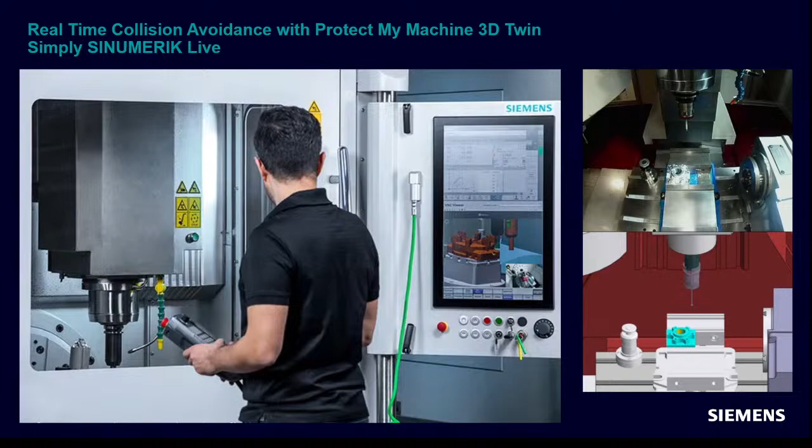I'm your host, Chris Pollock, and today we're going to take a look at a relatively new piece of software for Siemens called Protect My Machine 3D Twin. Now, Protect My Machine software is kind of the latest in a series of softwares in the collision protection environment, right? So Protect My Machine is kind of our newest and most advanced feature of collision avoidance.

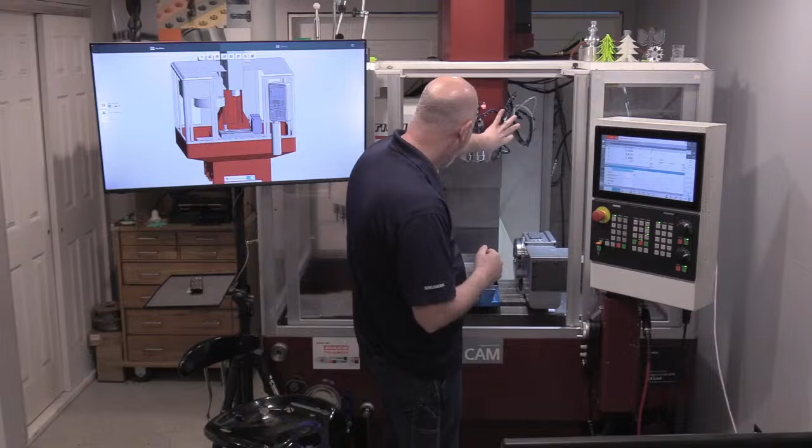Now, Siemens is no stranger to collision avoidance. We've had products in this space for a long time, and the traditional collision avoidance that we've offered had a very specific task in mind. It was designed to protect my base machine elements. So what do I mean by that? I mean, this spindle should never be able to drive into that table, right? This head should never be able to hit this fourth axis.

On a more complicated 5-axis machine, as your trunnion table, let's say, rotates around, my elements of the machine should never collide. Now, what it didn't know, and it was never designed to do, was protect your fixtures. It had no idea where this vise was in space. Your workpiece blank, it didn't know where that was. Your tool holder, it could protect your basic tool geometry, like your length or projection and your diameter, but it had no idea what the tool holder shape was, so there was no kind of holder protection.

And this is what led us to develop Protect My Machine 3D Twin. What 3D Twin allows me to do is I can create an entire digital environment of my machine space, including my work holding, my stock material, all my tool holders in their library. And once it's implemented, I'm now protecting that entire space.

So, you might see this piece of software over my shoulder here and take a look. And for those of you that are maybe familiar with our digital twin software, Run My Virtual Machine, you might say, boy, that looks very similar. That must be Run My Virtual Machine. And you'd be almost right. So the software is based on the 3D side of Run My Virtual Machine, but this is in fact Protect My Machine 3D Twin. Now there's a fundamental difference between the two products.

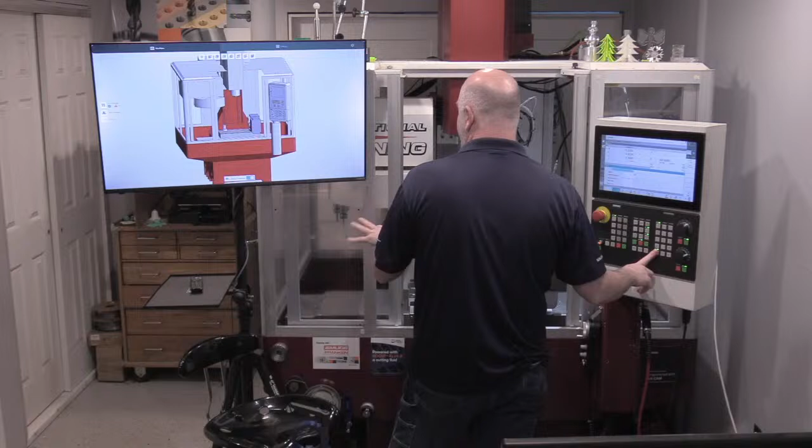Now when it comes to collision avoidance and protecting the machine with Protect My Machine 3D Twin, the difference here is now that model is connected to this machine. So if I come to the machine and I start jogging it, you're going to start to see the model is moving in connection or in time with the machine tool. They're handshaked. So anywhere I ask this machine to go, it's going to know in this 3D space.

Now this software, this is sitting on a PC. It could be implemented right in a PC at the machine tool control. That would be one option, quite commonly applied. Or you can actually have it running on an external PC. So in my case, I do happen to have a PC right here. This is where I kind of manage the videos, do my production, and I do a lot of my job preparation here as well. So I opted to install it on this PC.

On my machine, this is running our embedded system. So this is running a Linux environment. So in this case, I didn't have a Windows environment to install the software, so I'm using my external PC. Had I had a built-in IPC with Windows, I could apply it here at the control.

So what I wanted to do is I wanted to kind of show you the product and go through a little bit what the process would be in setting up a job, and maybe time allowing, we might even get a chance to cut some chips, certainly open up the Q&A to talk.

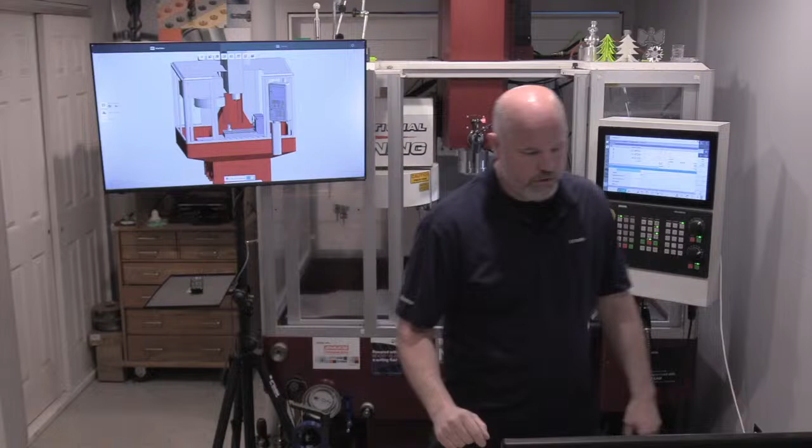But if I'm already using the digital twin, we've created some very simple ways to take all the work I've already done in setting the job up in my Run My Virtual Machine software and transition it directly into Protect My Machine 3D Twin. So that's the way I set this job up. So that's what we're going to look at today. We're going to jump into our software. We're going to take a look at Run My Virtual Machine, and we're going to now transition this job into Protect.

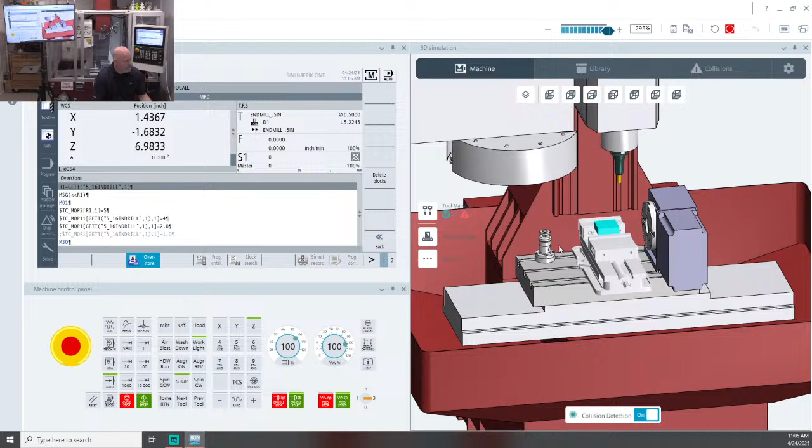Okay, so what you see on the display, this is my digital twin environment. This is Run My Virtual Machine. Normally you could see the name in the upper left-hand corner, but I do have my little camera view there so you can still see me. But this is where I would have set up the job. So this is a pretty straightforward setup. I have done quite a bit of content on this, so we're not going to get into all the nuances and detail here. I have previously set up the job in this software to save us some time. But let's look at what's unique to the job.

So first things first, I'm going to have some kind of a program. Now, in my case, I've established a shared folder, and that's where I see this Programs button. This folder is not only in Run My Virtual Machine, it's a folder on my PC, and that shared folder is also shared with the control. So I have a common working area. If I don't do that, I can absolutely transition the programs over to the control via USB stick or some other method. That's up to you.

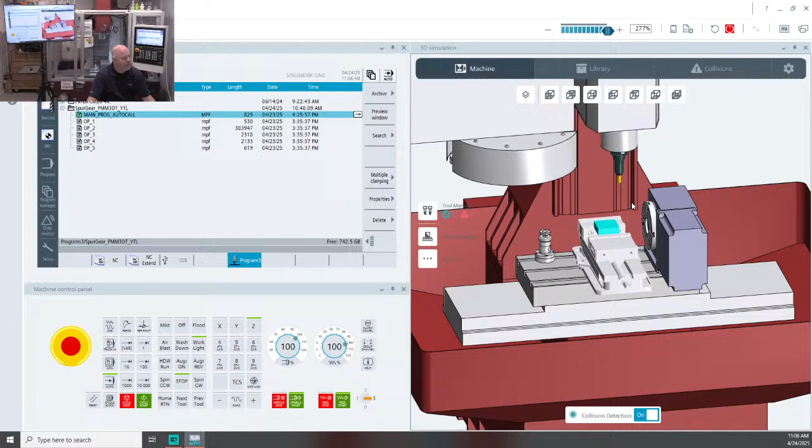I also went in and I started doing my setup, right? So I first came into my library, decided how I was going to hold my part. In this case, I'm using a standard 6-inch vise. Created some kind of blank for my stock. That was then installed on the machine, set up for my basic prove out.

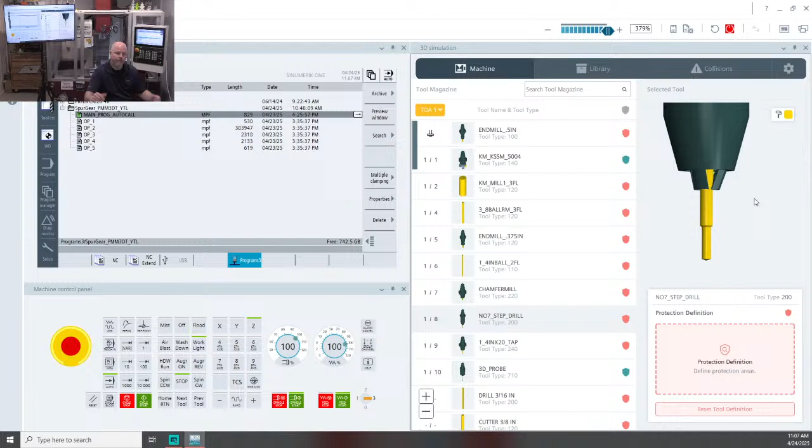On my tools, I decided to come in and bring in the models of my tools, drop them in, bring in some different custom tools. I was drilling and countersinking with two separate tools before, so I wanted to optimize that. So I brought in an STL of this Emuge step drill. This allows me to combine two operations in one, and I also wanted to show you how we would set that up. So here we have all of our tools set up in our library. We have our job set up, and now I would normally transition to our auto mode and run my job, right? So this would be my normal process.

Oh. Hold on 1 second. Overstore is active. What is going on here? Oh, I hit my overstore button. I was looking going, what is going on? Overstore is a little like MDI in auto mode.

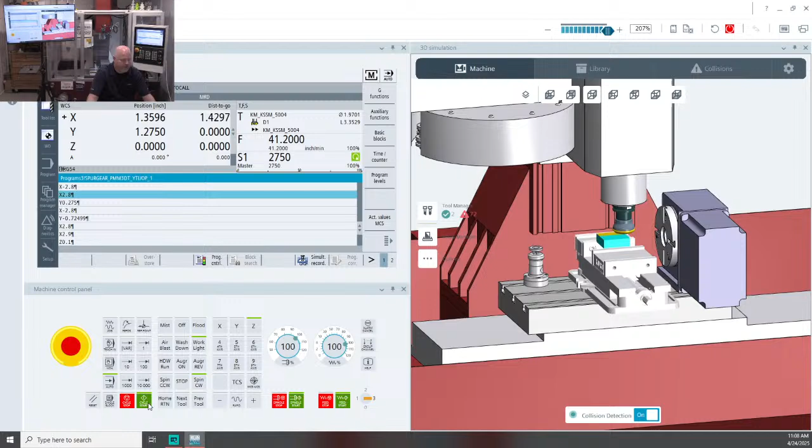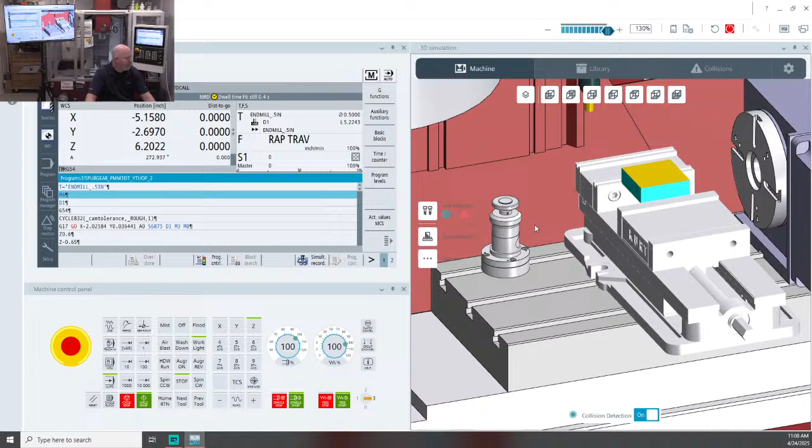All right, so I can check and do my normal proof of concept like I would do when I'm leveraging my digital twin. So this job was actually programmed out of a CAM system. I believe I used NX for this job, and then I spliced it all together. I did use a main program, sub-program strategy. So if you look back at this job, you see I got my main program here, and then each of my operations will be my individual operations for the toolpath. So I would normally come in, evaluate all this, system comes down, starts running my job, right? This would be a pretty standard process.

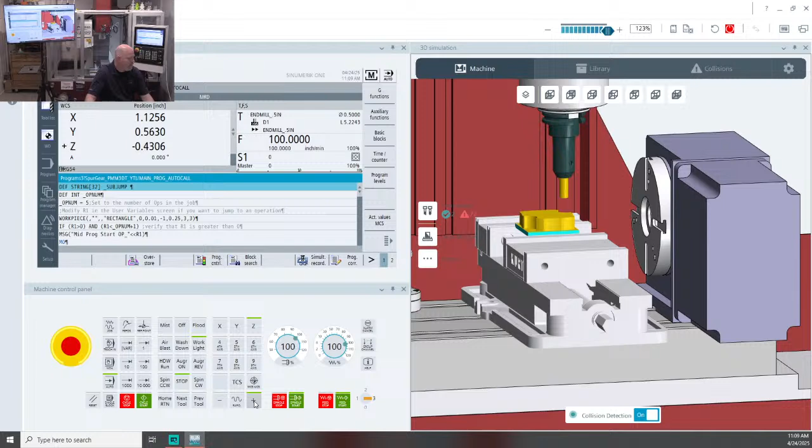And typically at this point, I would be at the end of my use case for my digital twin, because I did a proof of concept, validated that the tools look good, holders look good, I'm happy with my work holding and whatnot. So now I would just transfer the job over to the machine and start building it up. But in this case, now we have our 3D twin as part of this process. So I'm not going to bother simulating the whole thing. You guys, I'm sure, have seen this kind of stuff before. But once I have the setup proved out, now what I can do is I can start to transition data out of Run My Virtual Machine.

And it's quite simple. So what I'm going to do is I'm going to go to our little setup gear right here in the upper right-hand corner. Once I come to the gear, I want to decide what am I going to export. Now we give you a bunch of options.

I don't need the machine model because that's already there in the software, but I am going to want to grab my library of tools, work holding, all that kind of stuff, grab my settings. So just by coming in and selecting export, it's now going to give me the ability of exporting that data.

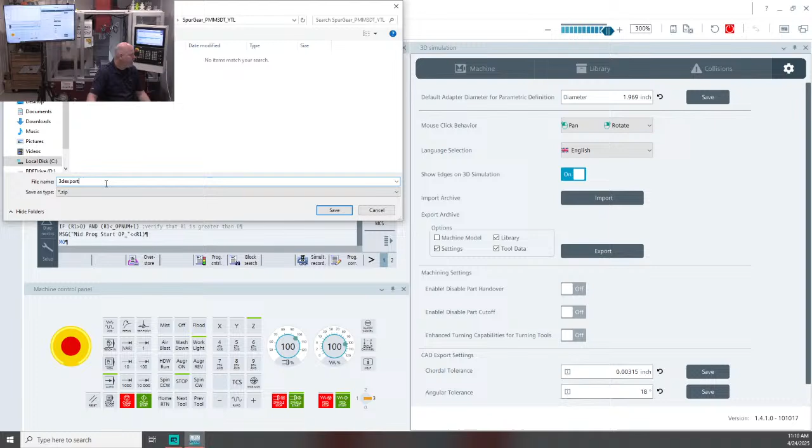So I'm going to come to maybe my shared folder and just create 3D export, a simple file, save it so I can access it from the digital twin side. Now when it comes to my program, since I'm already working on a shared folder, I don't actually have to transfer. If I wasn't sharing a folder, then I might copy that out to a USB stick or some other method to transition it.

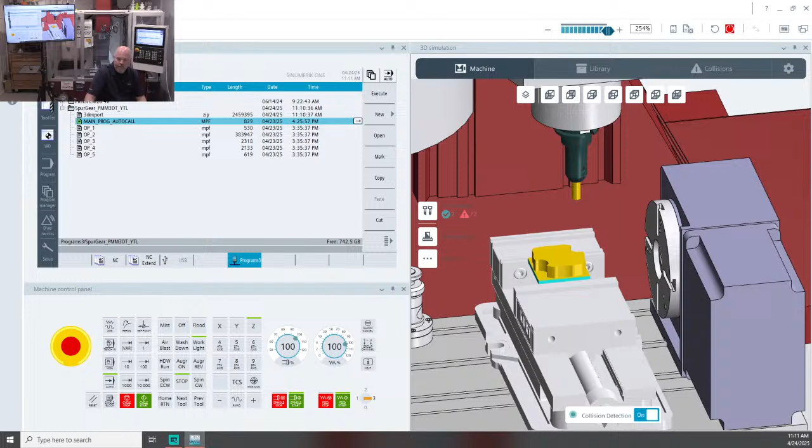You do see we got the 3D export zip file that was exported from the software. So now we can start to transition all of this into the 3D Twin software. Now, one of the things I have previously done, just for the sake of limiting the amount of time needed, I did pre-create the physical tools in the machine control, so you'll see that. But at this point, we can switch to our 3D Twin software.

And now I want to import my setup. So initially you look and the machine is kind of blank. It's in its natural state. If I look at my library, I don't have any setups currently in it, no tool adapters, no blanks. Everything is pretty much clear, right?

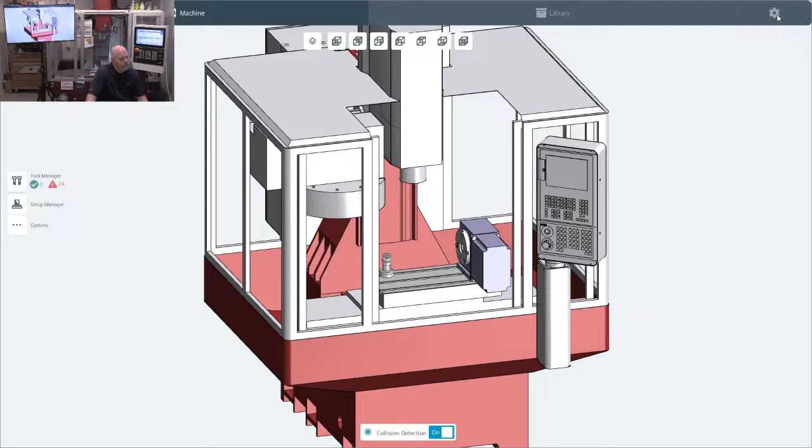So by going to the same spot, my little gear, and instead of exporting, I choose import archive, I can now bring in all that data that I previously set up. So we come up to our shared folder, find our new export, open it up, and now the system is going to bring that in.

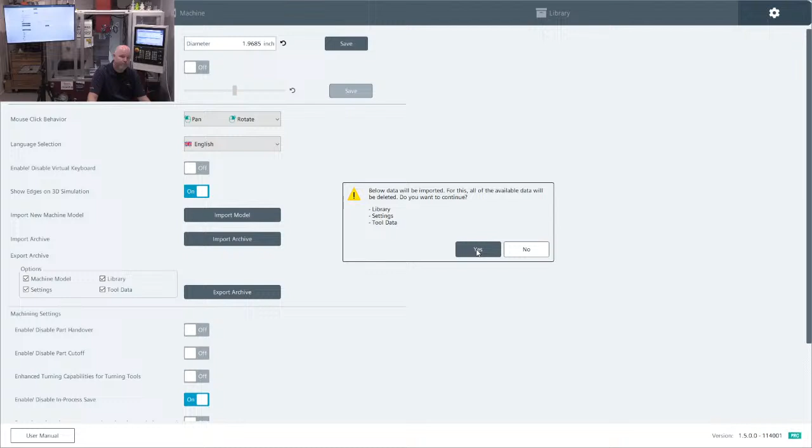Now, one of the things to be aware of when I use this method is it is going to wipe out anything that was previously in the library. So that's okay. If I didn't want to do that, let's say I already had some stuff previously set up in my environment, I don't want to lose it, I can also go into each of the library areas and discretely export specific components, right?

So I could have just grabbed the vise, sent that over, maybe a couple tool holders if I'm using a lot of common tools. So the process is really up to you how you're going to work it. But in the end, you want to bring that data in from that outside source, hence importing. Once the import is complete, we're going to get a little pop-up telling us that it's done importing that data that was exported from the previous software, and then we can move on with the next step.

And the next step being setting it up in the now machine world. There will be a couple extra steps because there's a few things that I have to accommodate for. So initially, we come back and we see now I have some stuff in my library. So there's my vise, there's my stock. I chose to separate these two.

Sometimes you'll do your setup and you'll have the stock already mounted to the vise. In my case, I would make that choice based on what I know I'm going to be doing. So I may be moving around the stock if I don't have a positive stop. So maybe I want the ability of having them independent of each other.

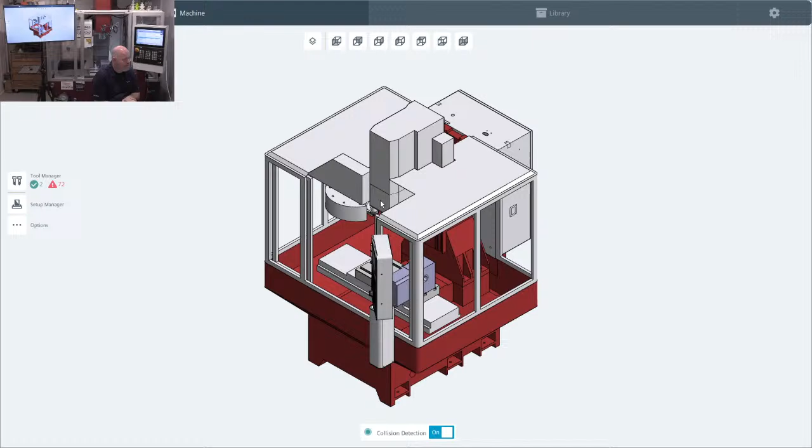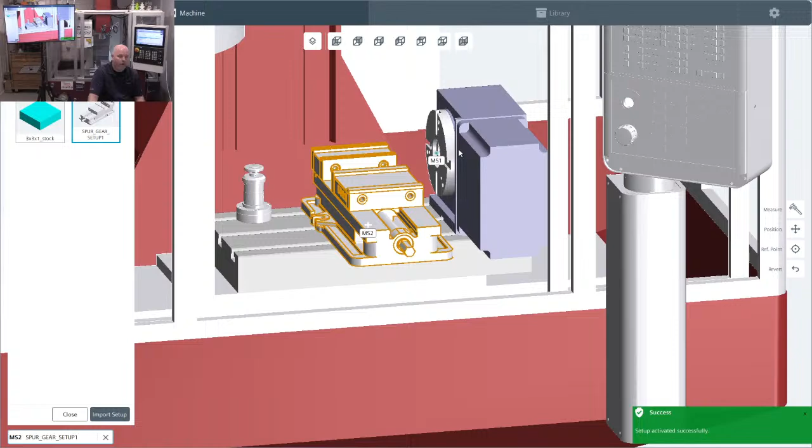Now you go into your 3D space, we can initially drop in the vise. So I'm going to go to import. I'm going to grab my vise, and this machine has two different mounting locations. Oops, and I grabbed the wrong one. We have my table mounting location or my fourth axis. So here we have a vise dropped in. Yep, so there's a rough position of the vise.

Now, one of the differences here that I have to accommodate for is, is this vise exactly in the middle of this table? You know, in 3D, I just dropped it on and it's good.

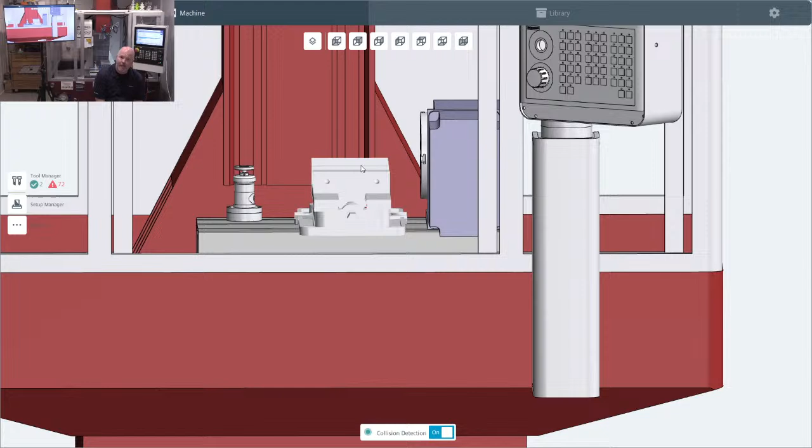But in the real world, when I bolt this on, it is probably not exact. So what I did was I actually established a zero on this vise to be the top center of the back fixed jaw. We're going to probe that vise to find its location, which will allow us to position the vise in the digital space, and then connect the models. But step one is I need to come down and probe it.

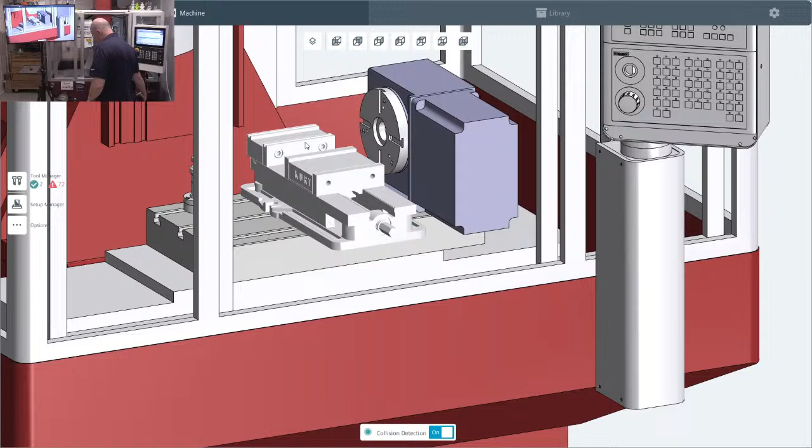So if I come to the machine, we'll just transition to our machine view, I can now start to move things around, give you a little bit more perspective of the view, and we can find the vise.

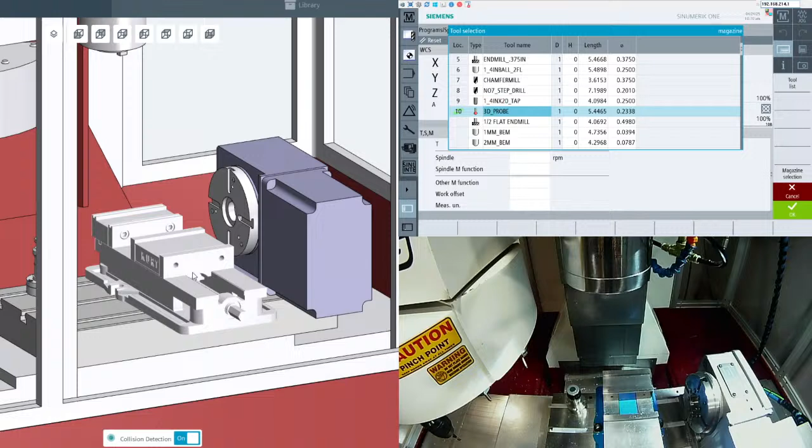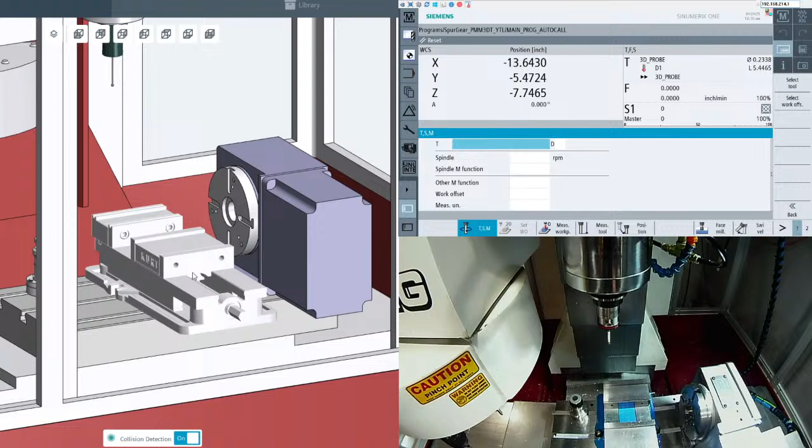Looks like I'm doing pretty good on time. It's always fun, you kind of manage these presentations, and I try to keep them less than a half hour long, and that's great, but how do you get all the content you're looking for in?

So in my case, I decided that I'm going to use G510, our 10th fixture offset, to set up my vise. I'm not going to go through the whole thing here, but I am going to show you some of it.

Now, if you look, I'm going to rotate around a little bit, take a look at our current position. If I was to bring my tool down, you see I'm nowhere near that vise. On the real machine, I'm right on top of it. But my vise itself has got to be an inch, inch and a half over. So this is why it's so important for me to have some mechanism to align the vise.

Now, I do currently have protection active, assuming my model is positioned in the right spot. Here you can see I brought my probe down where it would collide, but now it's just a matter of timing the two. I previously have set this up, but maybe I'm in a spot where I need to probe this edge but can't get down to it because it thinks it's hitting the vise. So if I need to suppress the protection, I can come over to this little toggle and turn my protection off.

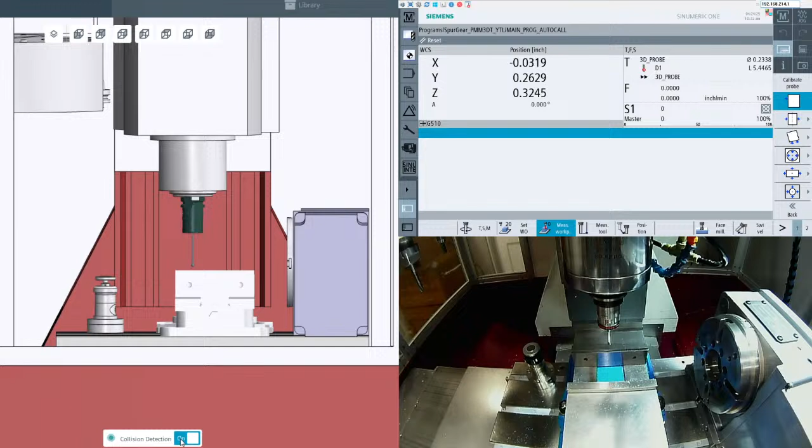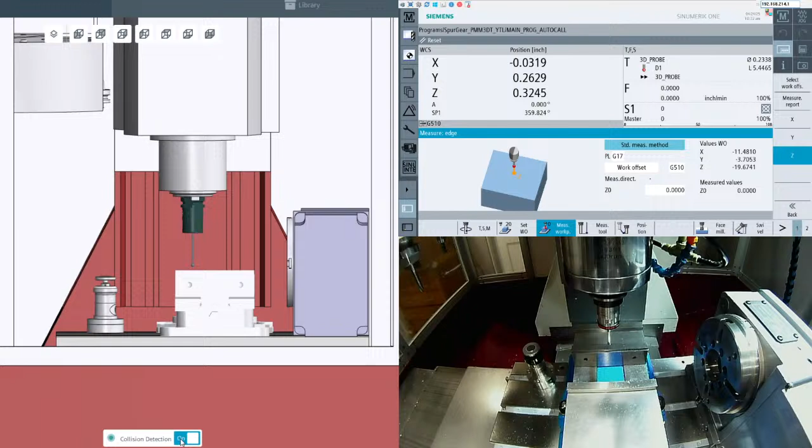But when we come into a measuring mode, the system's smart enough to understand that I'm being asked to probe a part of some type. Because of probing, I have to collide with some type of mechanism, so what we do is we suppress internally the collision model. We even give you a little message that it's being suppressed during the measurement, and away we go. So I previously found that top center point just like this before. We can get her out of the way.

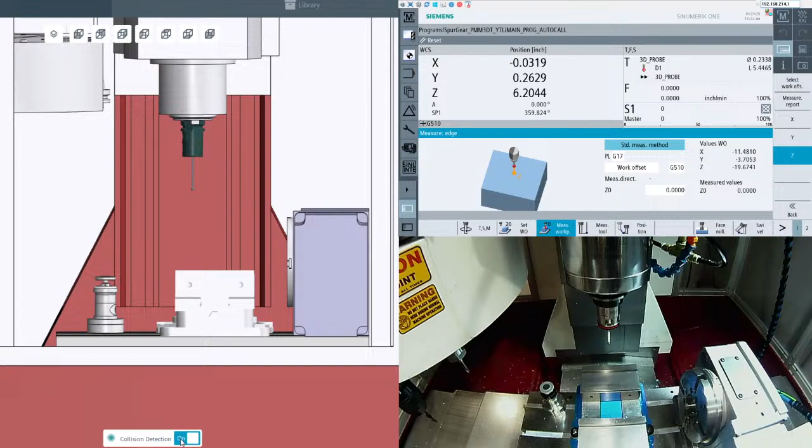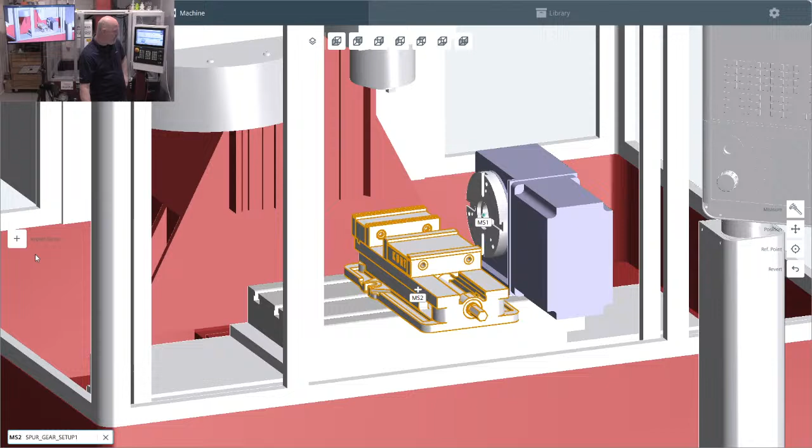So once I've established that zero, now it's time to connect the two. We come over, oops, not that view, this view. We come over to our 3D space, and first thing I have to do is tell it that I'm using a specific work offset for this vise. I can't do any modification of the model while it's mounted, so I'm just going to remove it initially. Then we're going to go over to our library, go to our setup, and open up the vise.

Once I've opened it up, here you can see I have my vises set up as my clamping, but what I want to do is go into this little offset, and we have a new feature you don't see in my virtual machine, which is this reference point option. This allows me to establish a reference point. I give it a unique name, and I can move that position around if it's something other than the zero of the model. In this case, I pre-established my model to where I wanted to set it, and now all I have to do is hit save.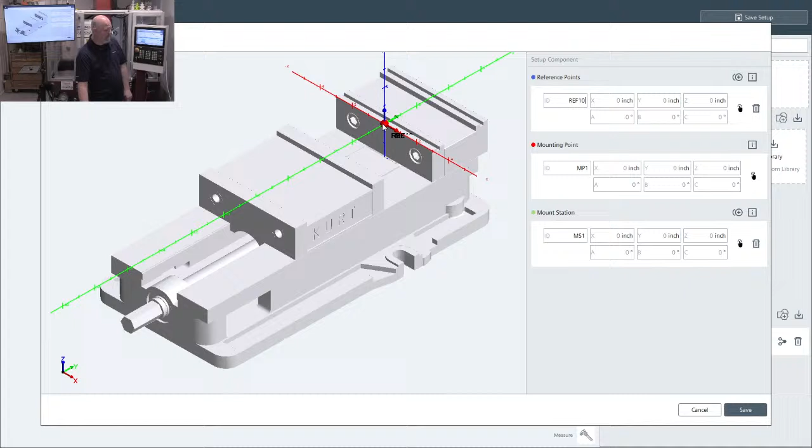And save that model modification, go back to machine, and drop it right back on my table just like I did before.

Initially, you see it's positioned down off of the connection, joint point, or mounting point of the model, but now it's time for me to actually make the connection to the work coordinate. So go over to this reference point bullseye on the right side.

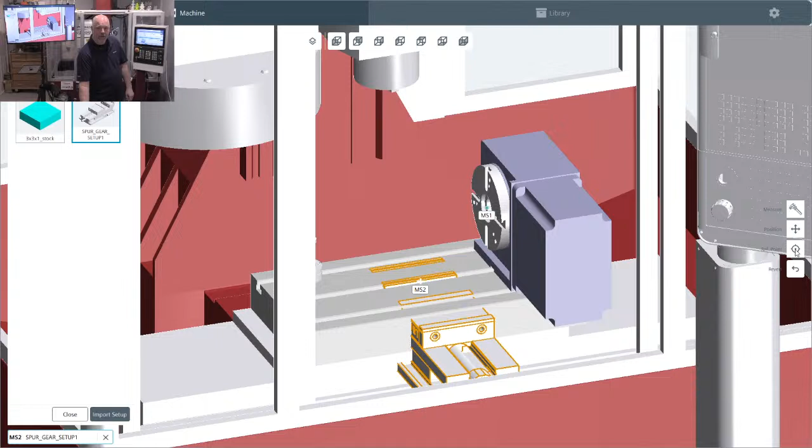Select it, and now I can choose if there is a reference point established. Before, if I went to look for this, I wouldn't have seen anything there. I can choose which work coordinate. It didn't choose this one, that's just from previous use. I like to use this work coordinate for my vise, but I pick the work coordinate I want, and then I hit the save or apply button.

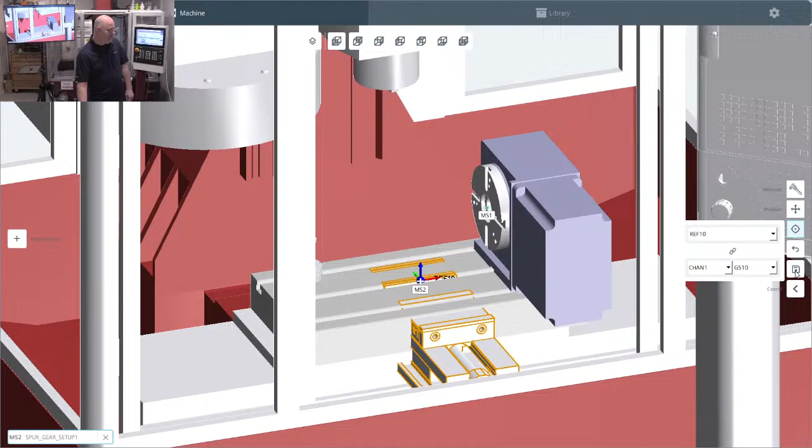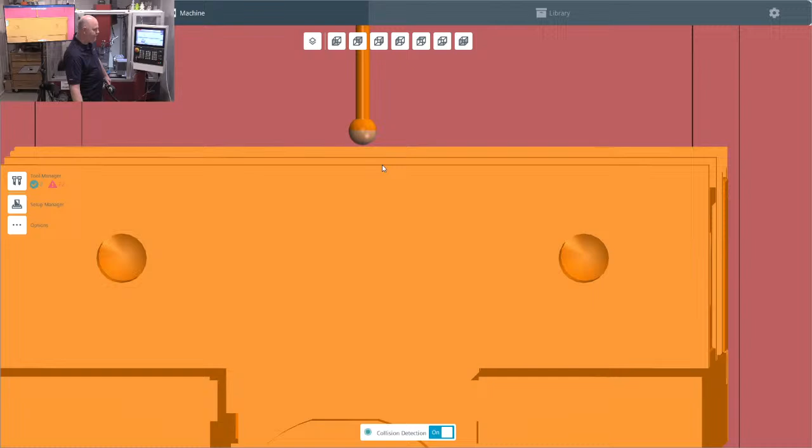And by applying it, now the vise positions, and if I was to bring the tool back down, now we're right on top. It's just off of the vise at a given gap distance, keeping me from crashing.

But now you can see it's perfectly aligned. I'm dead center of the vise. I'm dead center in that one. Okay, so that's my step one.

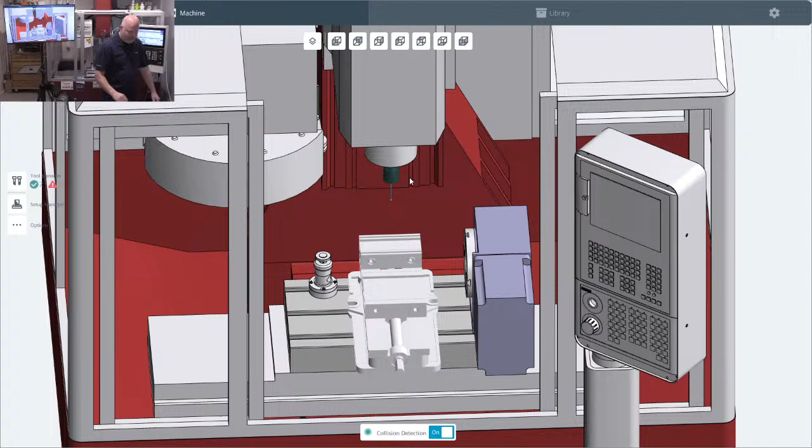Now what's important here, let's take a look a little bit closer at the model. Any discrepancy in my model to the real, I have to be cautious and careful of. So in this case, I didn't have a 3D model for that vise. This is a D675, it's a little older Kurt vise. I was able to get a D688.

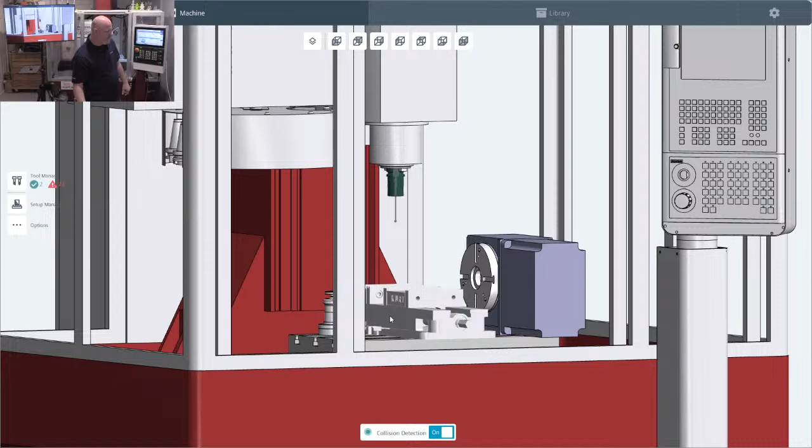They look close, but in fact they're a little bit off. So in my case, if you look really close you might see it, but there is a gap. My vise is actually floating in the 3D space because the overall stack height of this vise is different.

That's okay, just as long as I know and I anticipate it. So since I'm working from the top down, at least I know my top sections are protected. If this is critical, you're going to need to make sure the model itself is pretty accurate. Now there is some gap distance we set up to accommodate for any kind of model discrepancies, but wherever I can, I certainly want to be close.

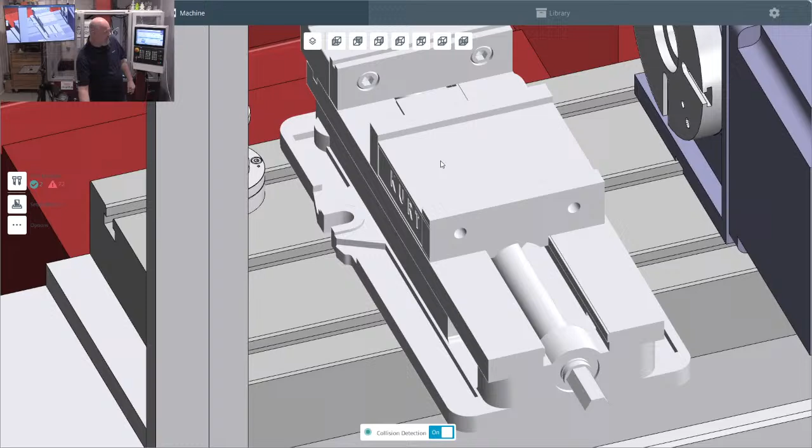Now the next process is going to be for my blank. So here, if I was to bring in my blank right now, it could be positioned anywhere on the table. So let's jump over to our library. I did previously have a work coordinate set up, but I don't have a stop, so we are going to have to adjust that work coordinate.

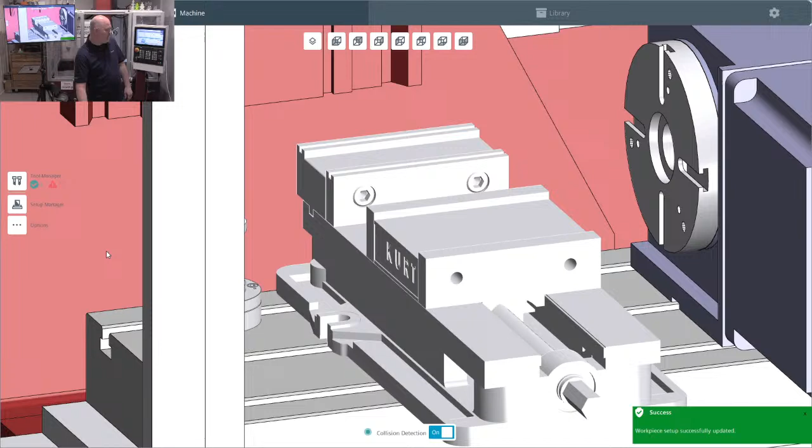So let's add a reference point. I'm going to call it number 1 because in my case I am going to use G54. I'm going to go back to machine. We can drop in the blank right onto my physical table mounting point.

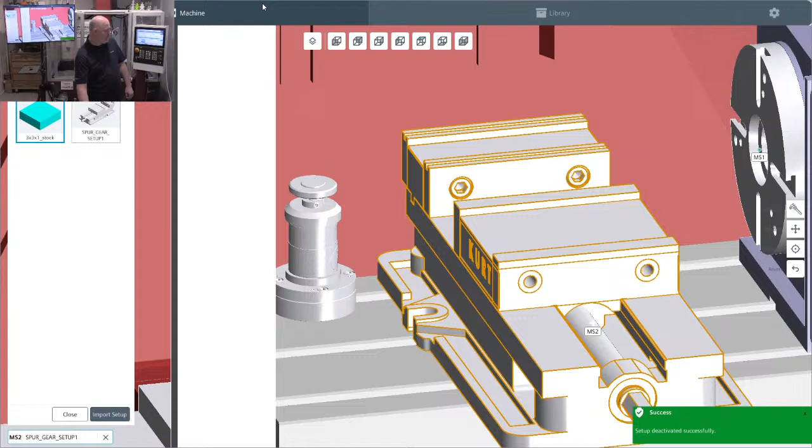Now you don't see the block because it's down here in the middle, since I haven't made the connection. In fact, let me look at this real quick. I want to make sure I have the right connection point first for my reference point. So when you come in, I would have been wrong.

So by default, it's using the 0 of the model. So I need to position that to where the 0 of my part's going to be. In my case, it's going to be the top center of this part.

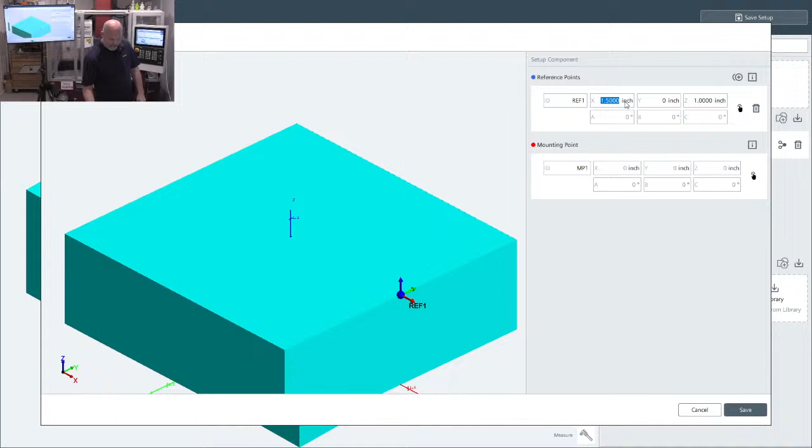Now, if I want to move it around, I can click on this little hand and click on points on my model, and it'll shift my 0 around. But what I can't pick in this case, since there's no feature in the middle, I can't get to the middle perfectly. So I can override this position just by typing the values right into this field. Now you see my reference point, where my G54 is going to be, is right there in the center.

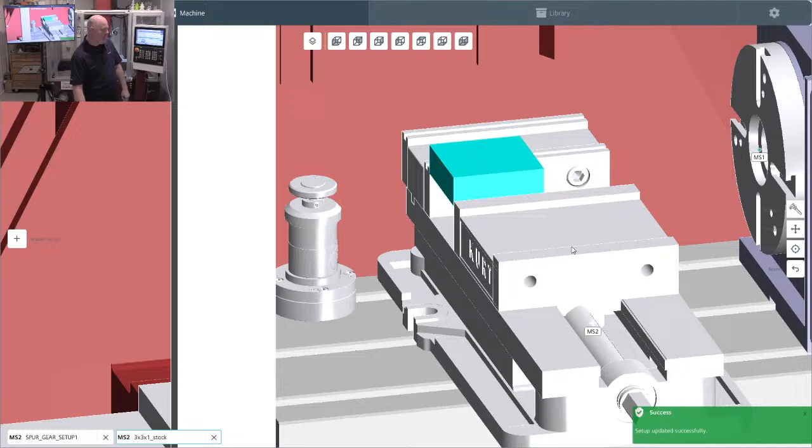So we save it, go back over to machine. We're going to again drop it into the space. Once it's dropped in, I'm going to connect the reference point just like I did before. Reference 1, I want to link it to G54, and I want to apply. Now, in this case, my blank is set up to the edge of the vise.

So I could leave it there, or I could move it. If I wanted to move it, I can do that now.

Let's go grab a little bit of stock. So let's say whether I'm doing some in-process probing, or my operator decided this is a better location for my vise or my part, I would have to now reprobe the part.

Want to make sure I have G54 set up, so we're going to grab G54. Bring my Z down. Now if you watch where the model is, obviously the part is off. I'm going to roughly set it in the middle.

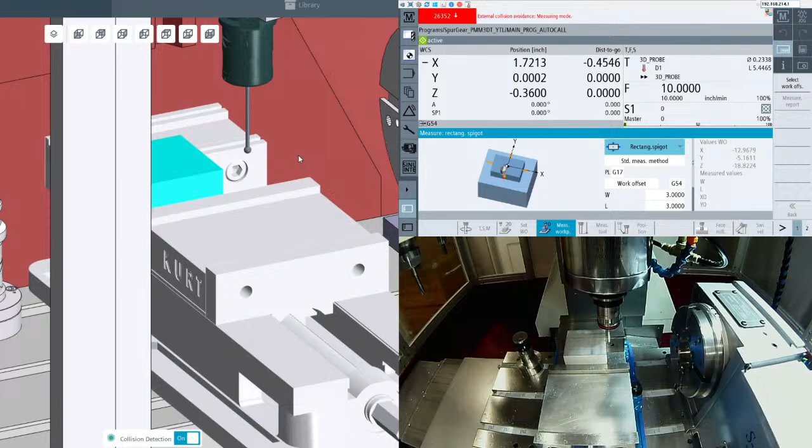Now maybe we find the center of my block. So she's going to go through, come across, measure, find my center. Now it's not going to immediately move the model - I do need to go in and accept this adjustment. You'll see that's last, and then we're really ready to run the job.

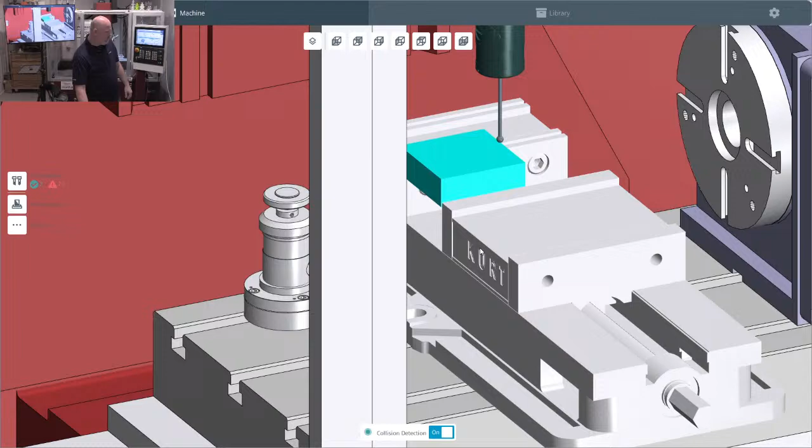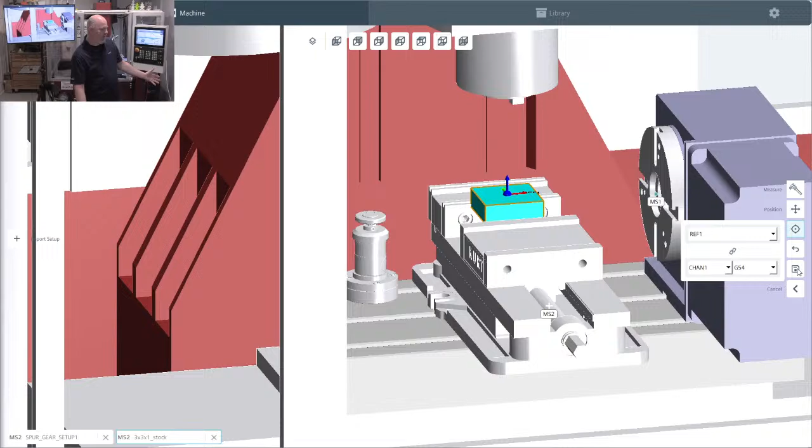Okay, if we come back to the full view, for me to now adjust the block, I just want to jump right back into Setup Manager. I want to click on the component I want to move, then go to Reference Point. It's there, I want to just say Apply, and you see now it has shifted the block to represent more where it represents in the real. Now we can come out to Machine, and we are ready to run.

So, final step if I'm going to run this job, we're going to come over to Program Manager. You see my shared folder here - that's the same folder I was working from in my digital twin. I come into it, you see that export file is there. I'm going to go to my main program, we're going to execute that. Fire up the machine.

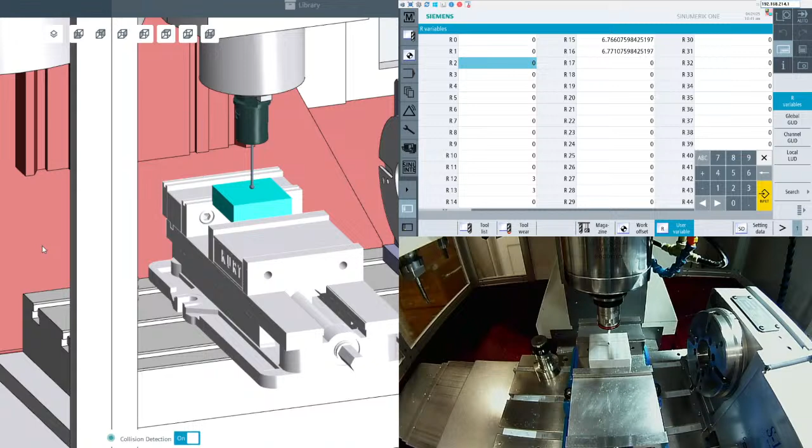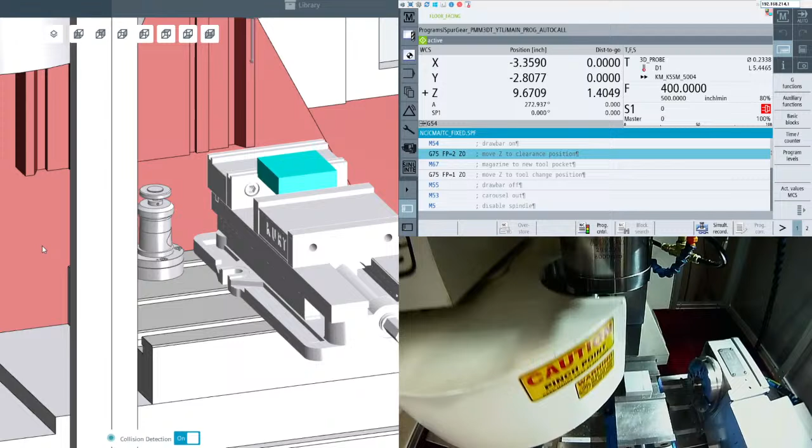I am using a tracking method to validate what my last operation was, so I just want to make sure I'm starting from the beginning. And now as you watch, as the machine moves around, the model is going to move around and stay in track, but I have that full protection. The system is smart enough to know if the spindle's spinning, then it's going to allow me to come in contact with my stock.

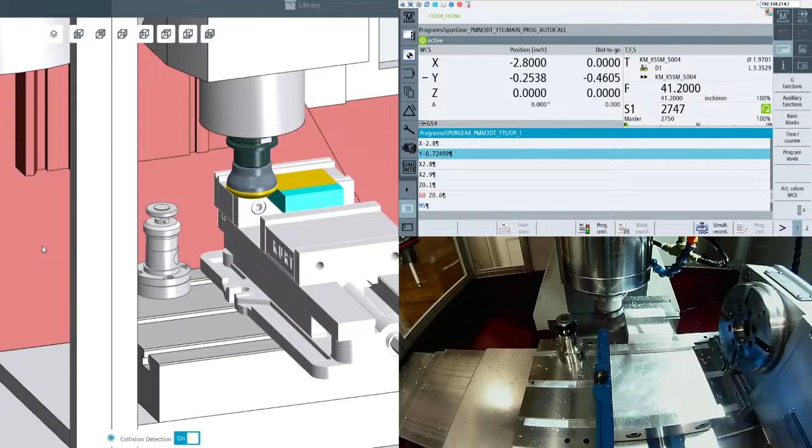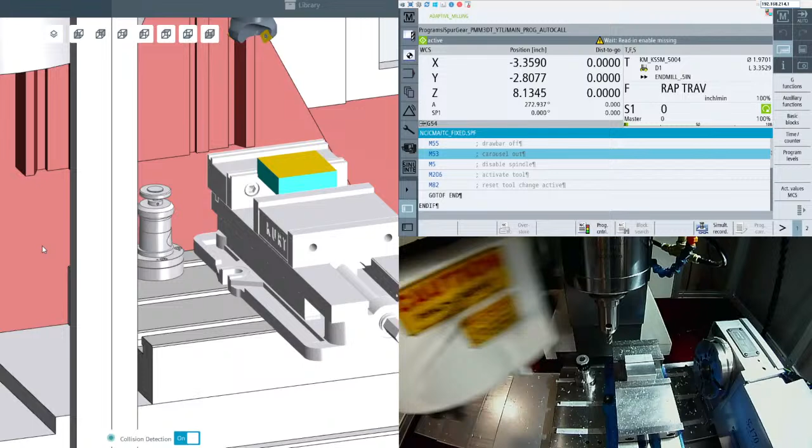Looks like I probably should have left a little bit more material. Not a problem. And away she goes, cutting my part. Now, had the spindle not been spinning, had I been in a rapid mode, it would have never allowed these two to hit. I am going to give myself a little bit of coolant here - hold on one second, I just want to turn on my coolant.

And there we go. Now, if you watch it, you'll kind of see there was a ghost tool in the Z. But if you look closely, I have the ghost tool for X and Y shut off, but you will see how the cut is in front of the actual position of the tool. That's your look ahead - that's how the system is anticipating if there is a potential crash, where it would be as we come through.

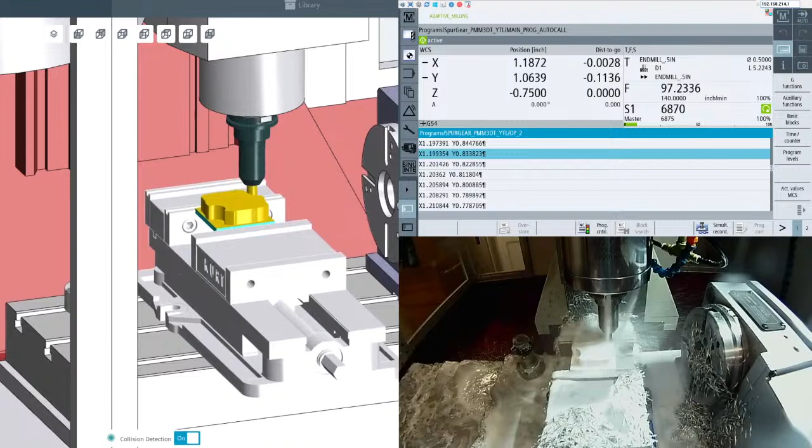So with that being said, let's take a look, see if there were any questions in the chat. Oh, it looks like you guys were really quiet. Oh, we got a hi, Mr. CNC. Well, thank you, I appreciate you coming to the event. Oops, I didn't want to do that. Let me jump here, I'm going to go back to our front view.

So, hopefully you guys enjoyed this presentation about Protect My Machine 3D Twin.